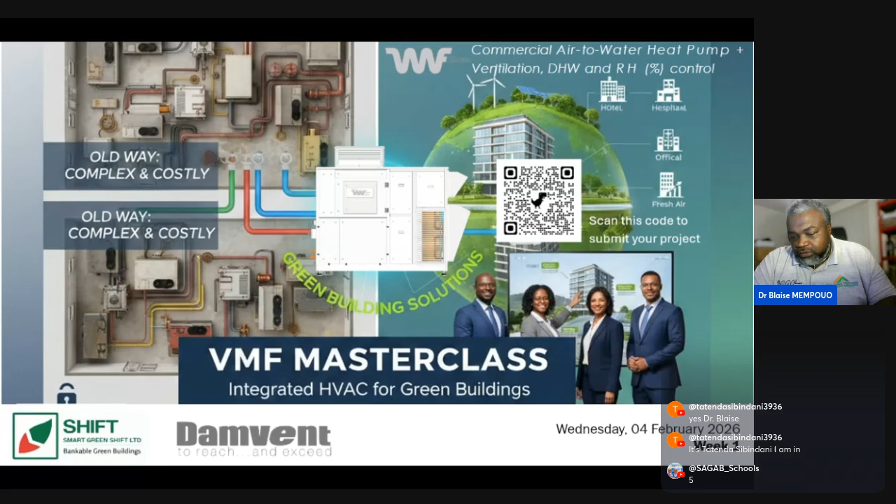So tonight I will try to cover a bit this first session. As you can see here, this is a masterclass about integrating HVAC for green building, from Damvent in Bulgaria. My name is Dr. Blaise Mempouo, I'm Damvent's Africa Market Development Lead. We are trying to work in partnership with Smart Green Shift Limited, based in the UK. Today I'm trying to introduce our ultimate energy saving total HVAC concept with a VMF. So the masterclass is all about that.

Before I move forward, what are you going to learn today? People attending the webinar today, this masterclass is mostly, it's not your usual webinar, but here it's about action. So our first idea is why this masterclass has been set up. I'm trying to discuss a bit about that, and then I will follow up with what is the VMF and the project and the application.

And how the VMF is linked with the EDGE certification. I'll try to discuss that and then do a bit of the base case study, and then move on to discuss the masterclass journey, how you can go through the masterclass. Because the masterclass is not about any current regular webinar, it's about a kind of journey. We are here to support your project to go from the idea to something real in the real application.

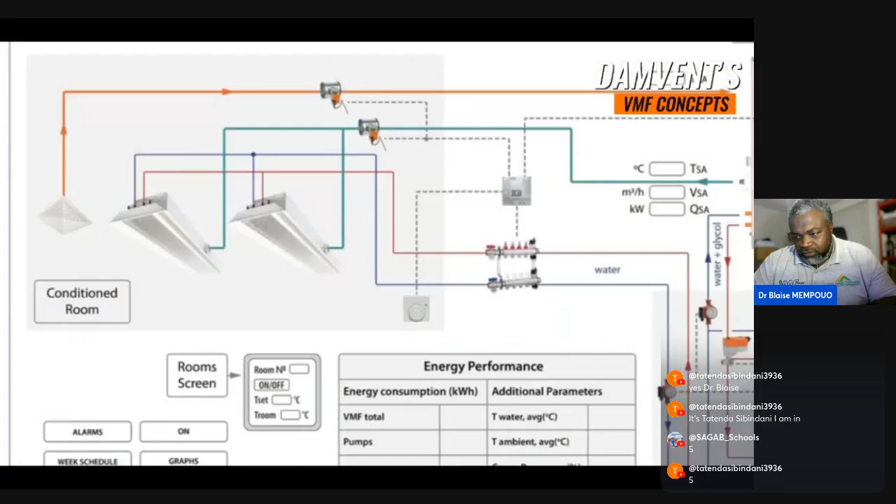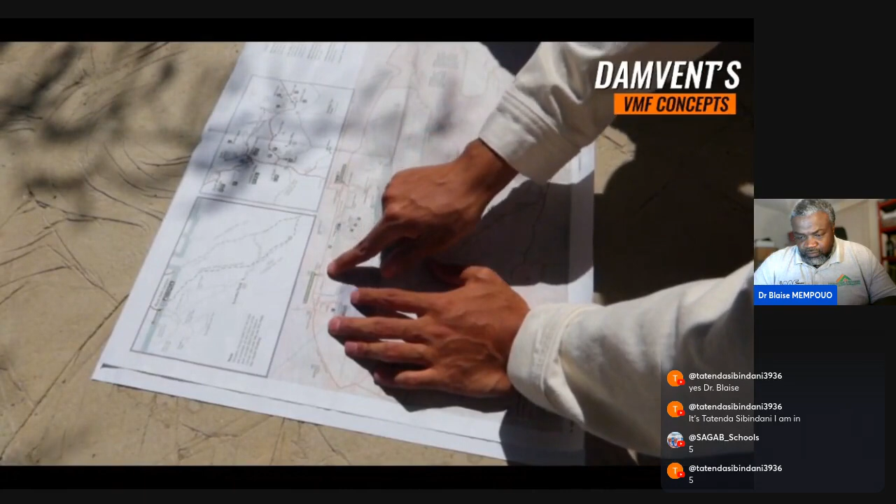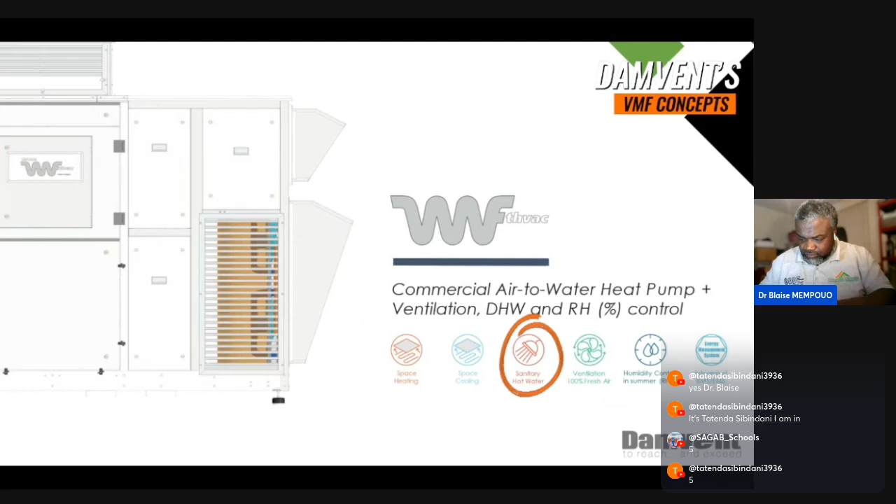Welcome to Damvent's accredited professional program, where we aim to lead the green building industry through innovative HVAC solutions. This program is designed for sustainability professionals looking to gain a competitive edge in the field of green building certification. Our key focus is Damvent's VMF technology, a complete HVAC concept integrated with building management systems. It covers heating, cooling, ventilation, domestic hot water, and humidity control in cooling mode, all while ensuring high energy efficiency. Through this program, participants will deepen their expertise in using VMF concept to meet green standards like EDGE, LEED, and more. With VMF technology, professionals learn how to optimize building performance, reduce energy consumption, and enhance indoor air quality, all crucial elements in achieving sustainability certifications.

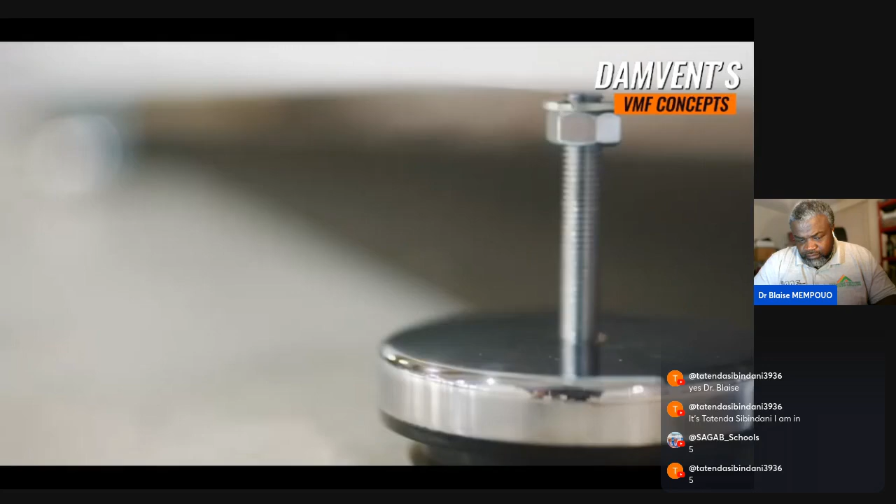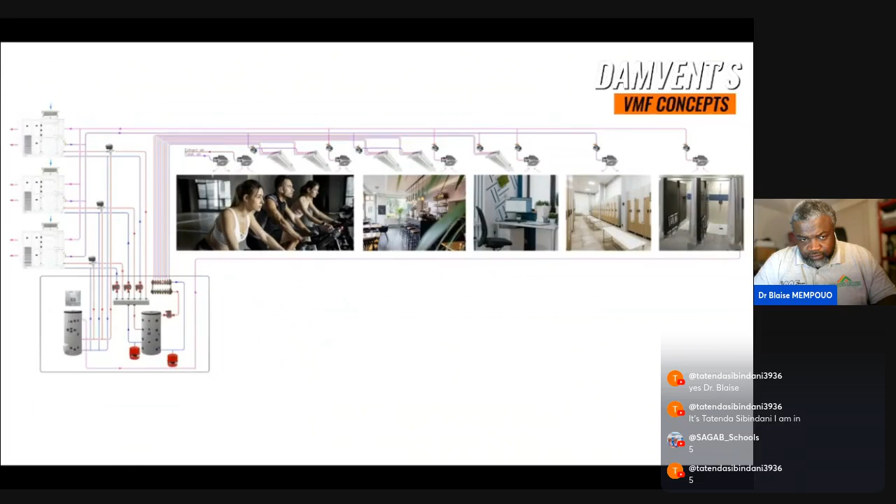The program not only offers technical training, but also provides marketing insights to effectively communicate the benefits of our systems to clients and stakeholders. Damvent's VMF concepts are versatile and designed to serve multiple sectors, including healthcare buildings like nursing homes, hospitals, and clinics. They are also ideal for retail spaces such as leisure centers, shopping malls, and supermarkets. Furthermore, our technology is a perfect fit for educational facilities, including schools, universities, and sports centers, as well as for office buildings or mixed-use developments combining office and retail spaces.

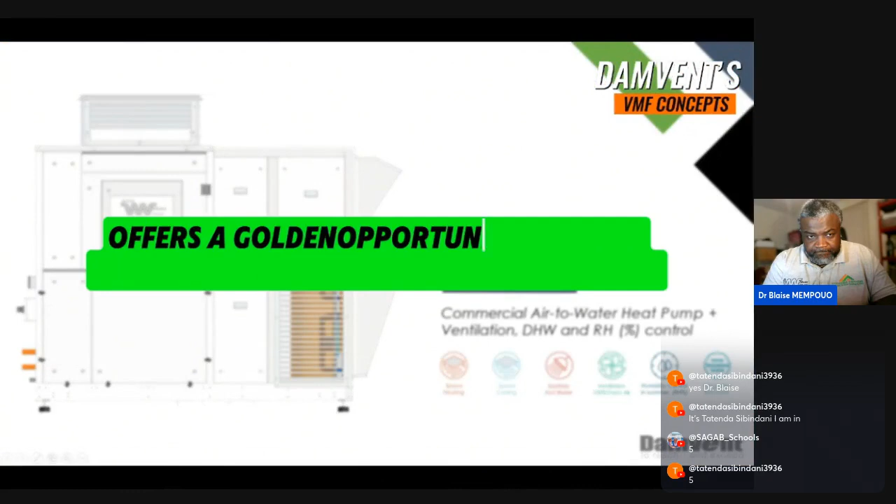After completing the structured training and certification exam, you'll receive an official accreditation, joining a network of certified professionals promoting VMF technology worldwide. This isn't just a technical journey, but a strategic one, empowering you to lead green building projects with confidence. If you're an architect, engineer, or sustainability consultant, this program offers a golden opportunity to stay ahead in the green building industry. With our global support and training resources, we are committed to making your journey towards sustainability impactful and rewarding. Ready to join?

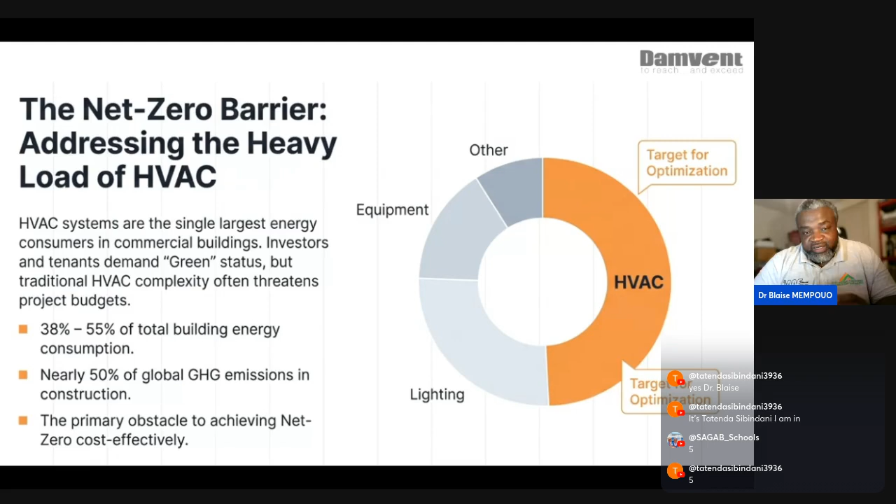At Damvent we can clarify that we're not just improving the VMF, the HVAC system. We're going to help support project owners or developers achieve net zero or zero carbon for buildings, mostly through very low energy consumption for HVAC applications in commercial buildings.

So we say that we're creating a complete new HVAC universe - a paradigm shift from legacy climate control, moving from the traditional way to a new hybrid VMF solution. That's exactly what the masterclass is about: to discuss and help you understand the new universe we're bringing to HVAC systems, and take you through that complete journey. This is the awareness class we are running.

So what is actually the struggle? If you're in the field, you know there's complexity out there. The problem is always juggling a complete system together. In a commercial building connected with an office, if you want to provide cooling, heating, and ventilation, most of the time there are challenges because you have multiple separate HVAC systems where a separate company may handle the cooling, the HVAC system.

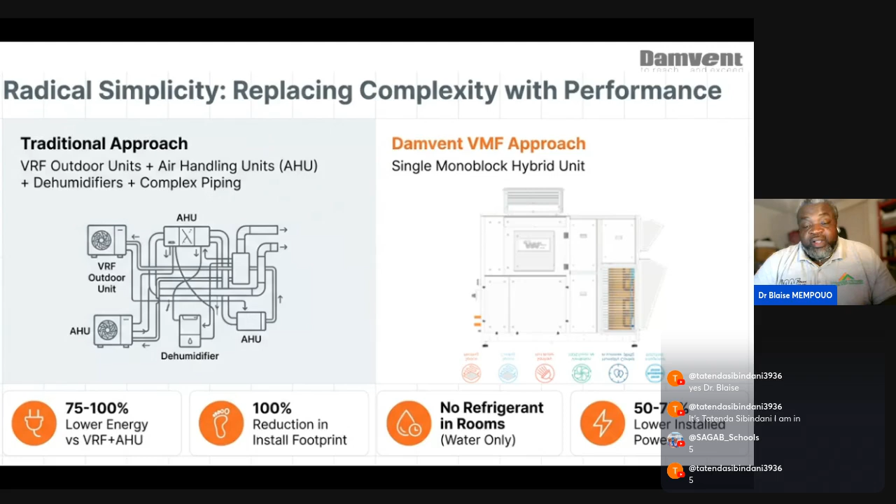Here we come with low energy compared to the conventional system, and also reduced footprint - I'll explain that later - in terms of installation footprint on the roof, and refrigeration too. We require no refrigerant in the building, which I'll explain in detail later. We also have low installation power. That's just to set the scene.

Another angle is the tropicalized technology, because HVAC in tropical climate countries, like most African areas, deals with high humidity levels. As you can see on the screen, the green areas are normally comfortable in this climate - we need dehumidification, close to 80%. In those climates, most of the time we don't just dehumidify, we also need to cool down, so we control temperature instead of just looking at humidity.

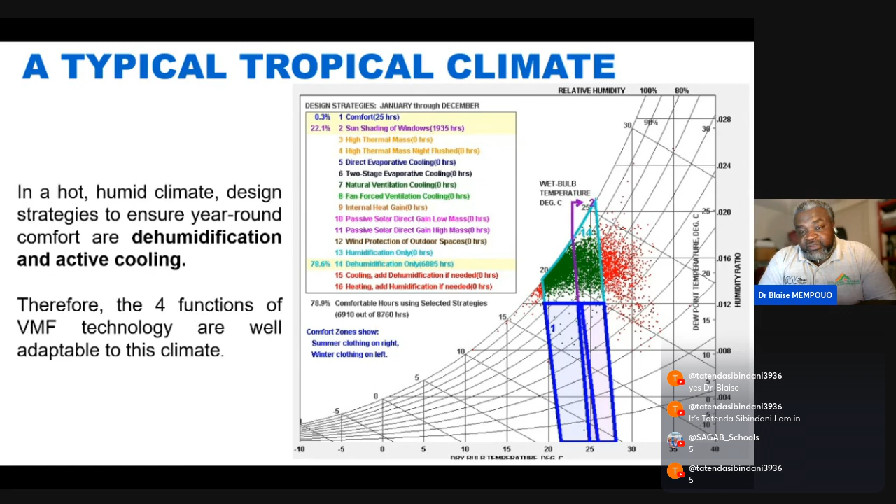If you look at it now, the remaining area in red has to be cooled down before dehumidifying. That's exactly where the high energy consumption in most conventional systems lies. That's exactly what we're trying to solve as an issue.

Okay, so now what's the VMF? I'll show a pre-recorded video from my colleague, Dryan, presenting what VMF is to you, starting with a short description of what VMF is.

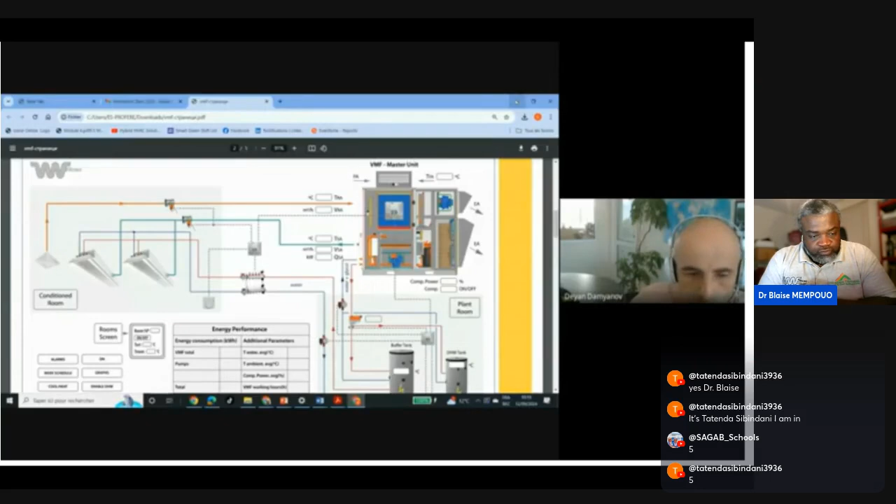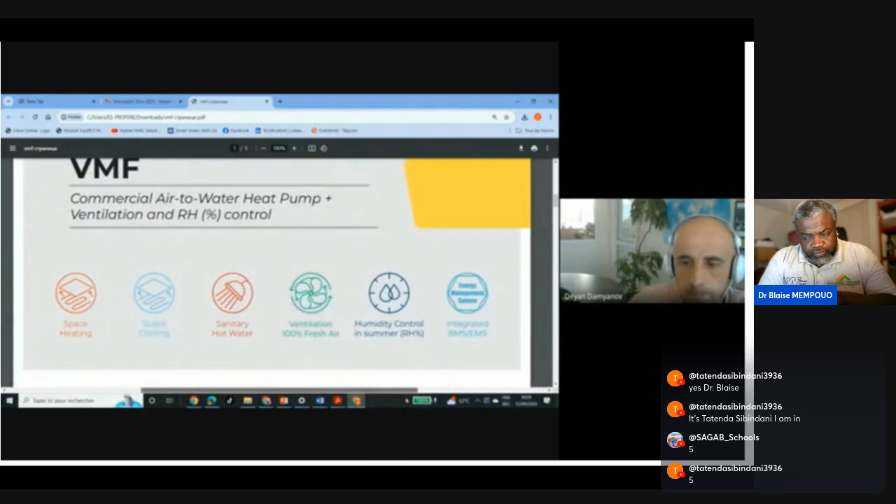VMF meaning is variable multi-fluid concept - not multi, but variable fresh air, variable refrigerant, and variable water all at the same time in one unit. As a description, VMF, and categorization, VMF is a hybrid.

Very often you will be asked, what is VMF? Is it a VRF? No, it's not a VRF. Is it a chiller or heat pump? Yes and no, it's not. Is it an air handling unit? Yes and no. So VMF is a hybrid.

We have categorized it as a commercial air to water heat pump plus ventilation and relative humidity control. Our goal was with just one unit to cover all 5 main functionalities required for every project worldwide: space heating, space cooling, sanitary hot water, 100% fresh air or ventilation, and humidity control in summer, in cooling. Together with those 5 functionalities, we add another one, very important, which is the integrated building management system, or in our case called energy management system, because it's a higher level system that controls the whole concept.

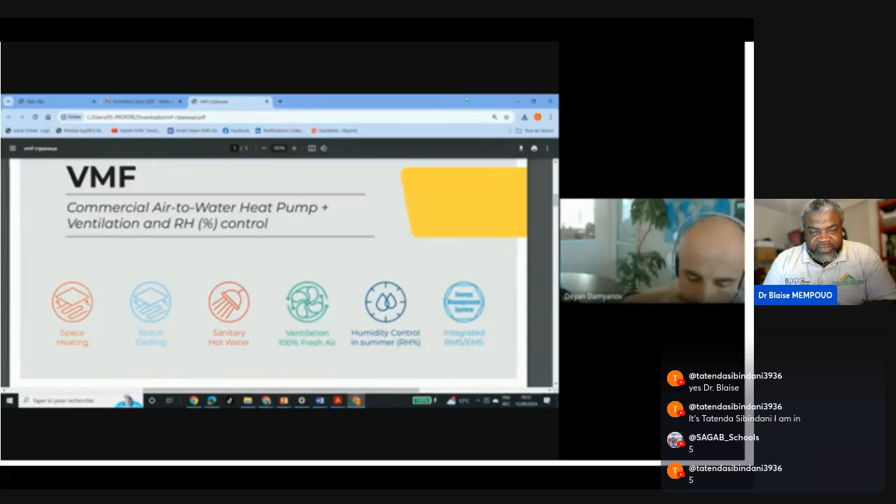I hope you clearly hear from Dyan, my colleague, because he's a bit late in his country, he cannot participate directly. He cannot give us a summary of the VMF.

So that was a kind of general definition of VMF. But when you look at it, we also have an internal unit. We don't use the chill beam, we don't use the cassette. Here in the VMF, we try to combine our external unit with the internal unit. Here is active chilled beam technology, which can be active chill for cooling or heating, both.

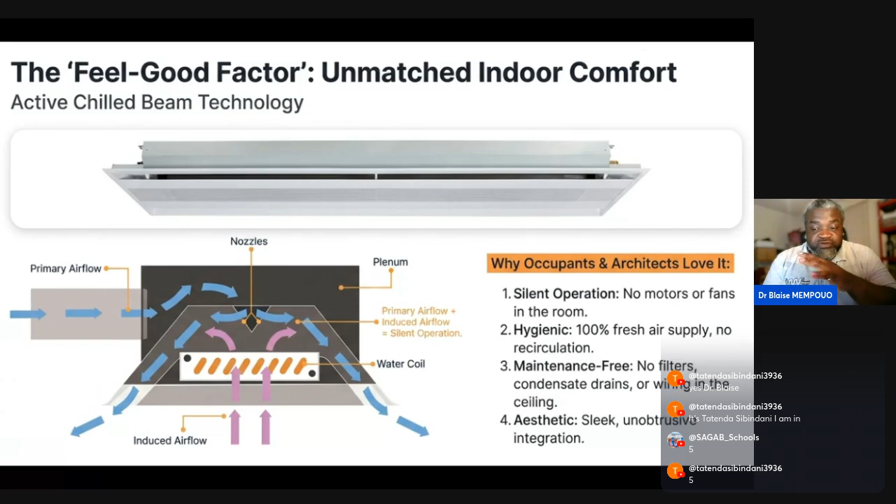As you can see, it's silent because you rely on water instead of refrigerant inside the building. So we have no motor, no fan indoor. It's always hygienic, 100% fresh air supply, no recirculation, because most cassettes use recirculation, meaning they use the same air in the room to provide you comfort, which normally doesn't work. Here, every time we have 100% external fresh air from outside. Maintenance free, and also aesthetically very integrating to any type of project.

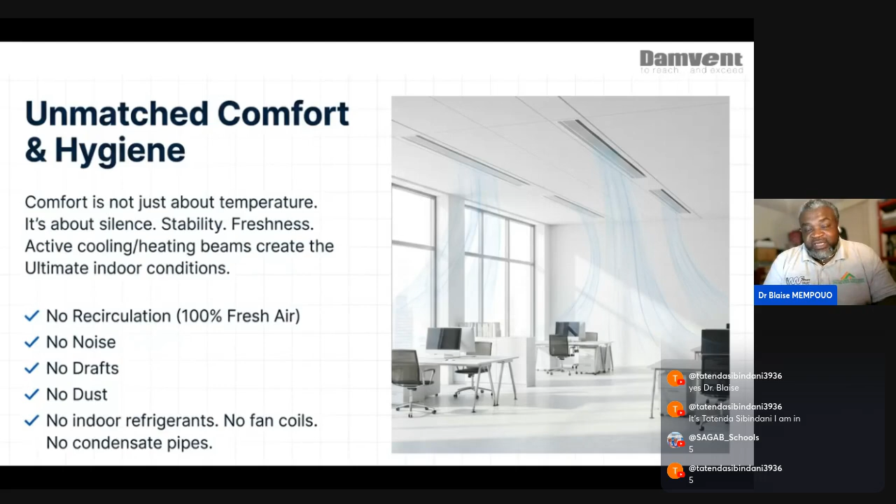In terms of comfort, the advantage of using the VMF, or mostly the chilled beam one, the active cooling or heating beam, creates the ultimate indoor condition. As I mentioned, no refrigerant inside, no noise, no drafts, no large dust, no small dust. There's no refrigerant, no fan coil, so no condensate pipe. All of this saves us some cost and some installation challenges, which is very important.

So in general, we are kind of zero indoor maintenance. No indoor electronics, no filter changes, no refrigerant to check or leak, no leakage to worry about inside. It's an independent remote system. You can easily get access to your system all over the world to assist you just in case you have any issues. So remote monitoring is possible also through Damvent.

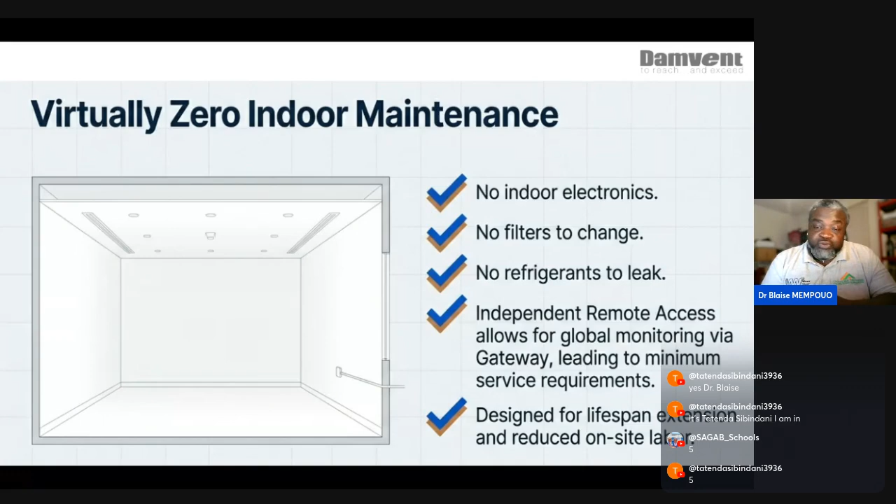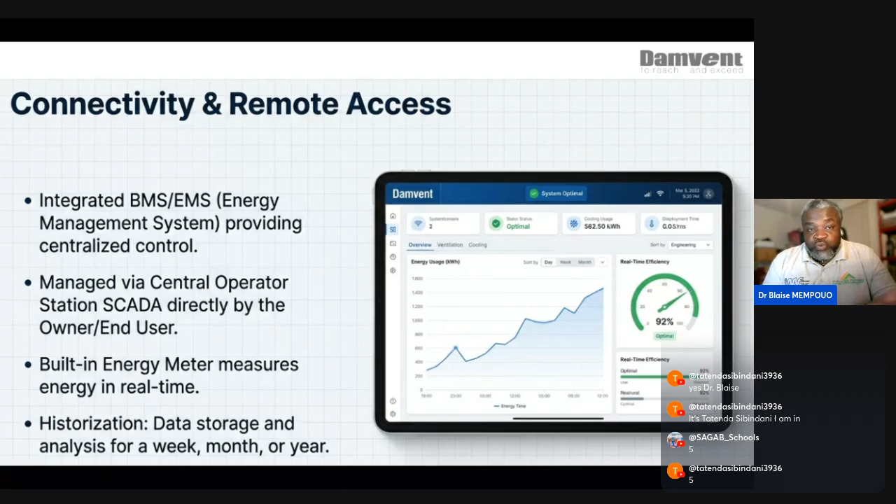It's also designed for lifespan extension. You can extend and integrate with other connectivity in terms of BMS system, Modbus, or data monitoring system, so it can easily be managed. The advantage here is that you don't need a separate BMS system, it's already an integrated energy management system, as he also clearly said during his presentation. The historical data can be stored in the Damvent storage system, weekly, monthly, or yearly, making it a very smart system which you don't need to look at another alternative system for.

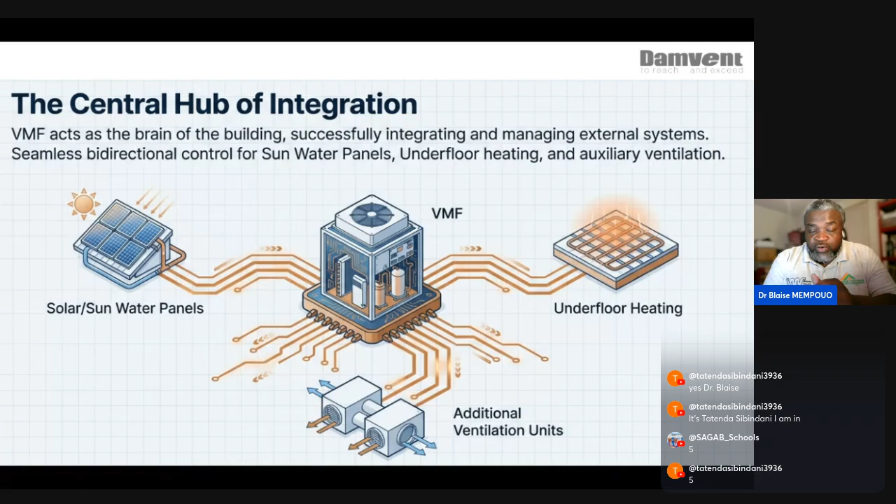When you look at the advantage of VMF, we built that for the future. It can be integrated with a solar system, which makes it more efficient. You can even add additional ventilation to it. That also makes it very efficient and provides stability for underfloor heating, because the heat it provides is very stable. It's a plug and play unit that stands completely outside, and it can be combined with other alternative systems.

When you look at the cost comparison between the system, the VMF and the conventional system, like I already mentioned, it saves us a lot of power. Power is really reduced. Installation power is reduced 50 to 75% in terms of peak demand, and it's also integrated domestic hot water.

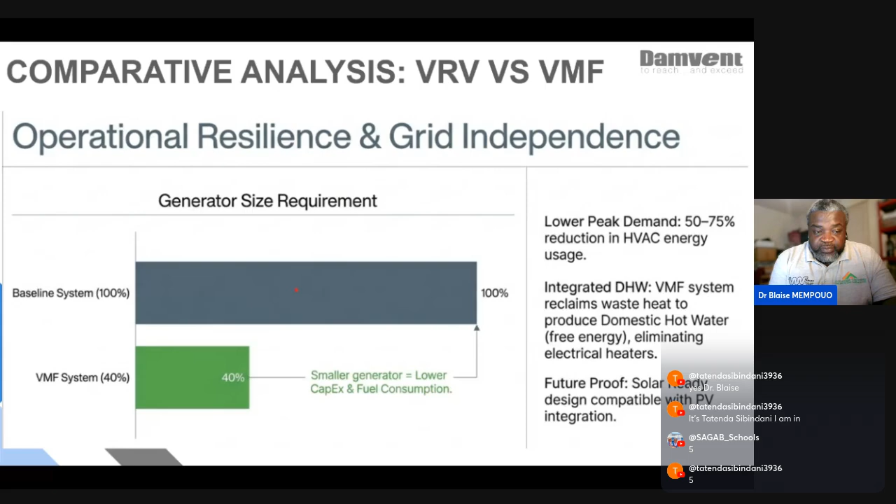I already mentioned that earlier, and free cooling that I'm going to explain later. And the solar-ready design compatible with PV can easily be integrated, so it's easy to apply in countries where we have problems with power shortage.

Yeah, it's true, because we offer so many benefits from the beginning. Maybe the capex might be a bit higher, which makes sense because we provide more functionality compared to the conventional system.

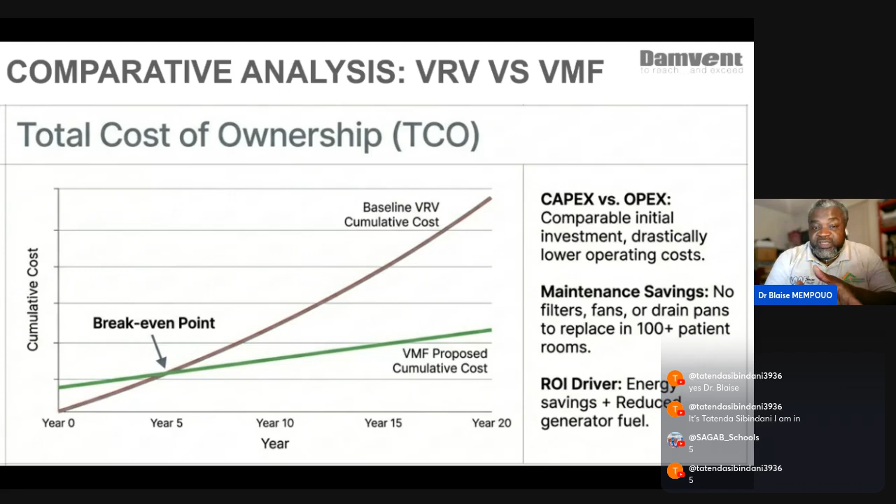Whereas with the VMF, you're going down, because all the benefits, as he mentioned during his presentation, are variable water, variable refrigerant, and air, which create a great advantage in terms of energy consumption. We also integrate the energy management system that makes it easy for you to monitor, because we have the economizer, the free cooling or free heating, that makes for very high energy savings also.

So here, what exactly, if I want to summarize this masterclass, this is a kind of summary of what I just mentioned. I'm going to play a little video again that summarizes everything I already discussed. I'll go a bit further and explain a bit more.

Today, we're going to talk about a piece of tech that is completely changing the game for how our biggest buildings breathe, stay warm, and keep cool. It's called a VMF system, and honestly, it's a huge leap forward.

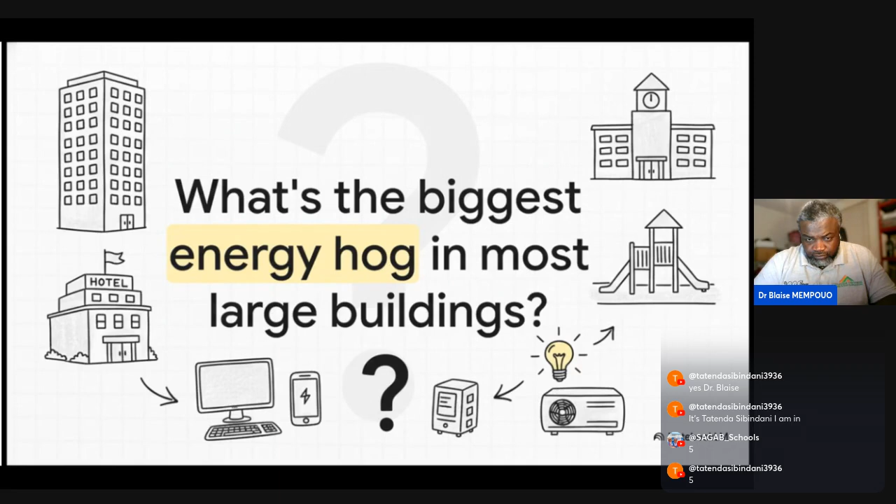But to really get why it's such a big deal, we first have to look at the problem it's built to solve. So let me ask you something: when you picture a big office building or a hotel, what do you think is using up the most energy? Is it the lights, the thousands of computers, or maybe something else entirely? Yep, if you're thinking it's the climate control, you're absolutely right.

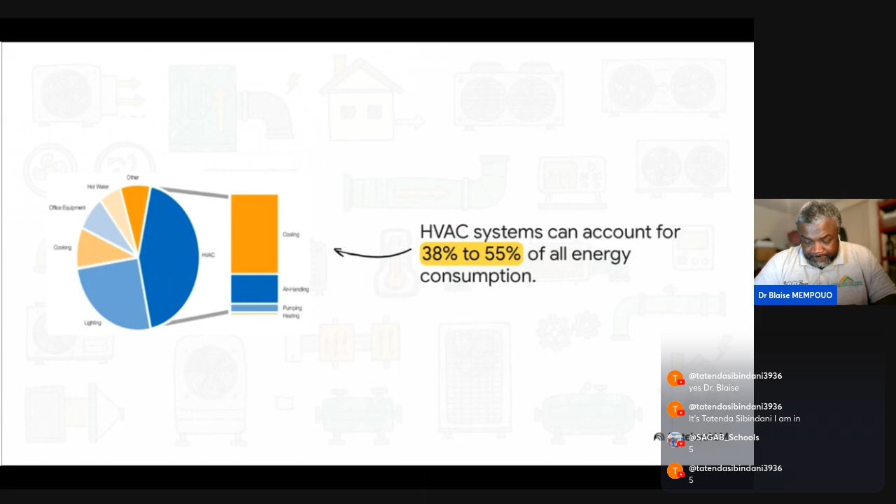The amount of energy is just staggering. In a normal commercial building, the HVAC system, that's all your heating, ventilation, and air conditioning, can guzzle down anywhere from 38 to 55% of all the energy used. That is a massive slice of the energy pot.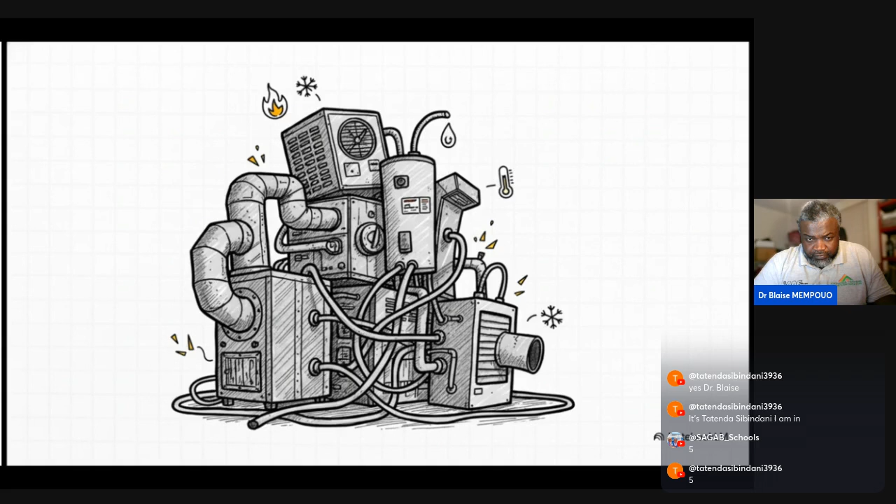For decades, the climate system in a big building has been like one of those old component stereo systems from the 80s. You've got a separate box for the heater, another one for the AC, one for ventilation, maybe another for hot water. They're all kind of Frankensteined together with a mess of wires and pipes, and they don't really talk to each other. It's complicated, it takes up a ton of space, and it's just not very efficient.

So if the old way is that clunky stereo system, the solution is much more like a sleek, modern smart speaker that does everything in one. And that, right there, is where VMF technology comes into the picture.

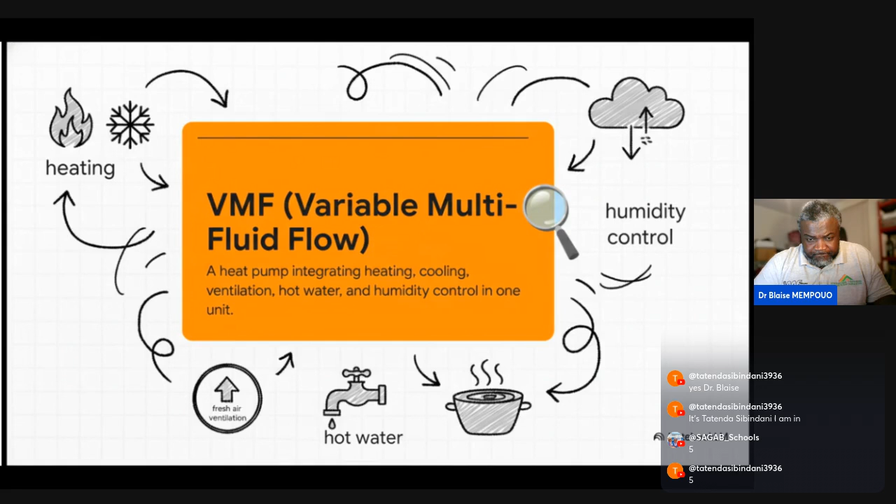Okay, so what is VMF? It stands for Variable Multi-Fluid Flow. Yeah, it's a commercial air-to-water heat pump, but the real magic is how it puts everything together. It takes all those separate jobs, heating, cooling, fresh air, hot water, even managing humidity, and packs them all into one single super smart unit, the whole shebang.

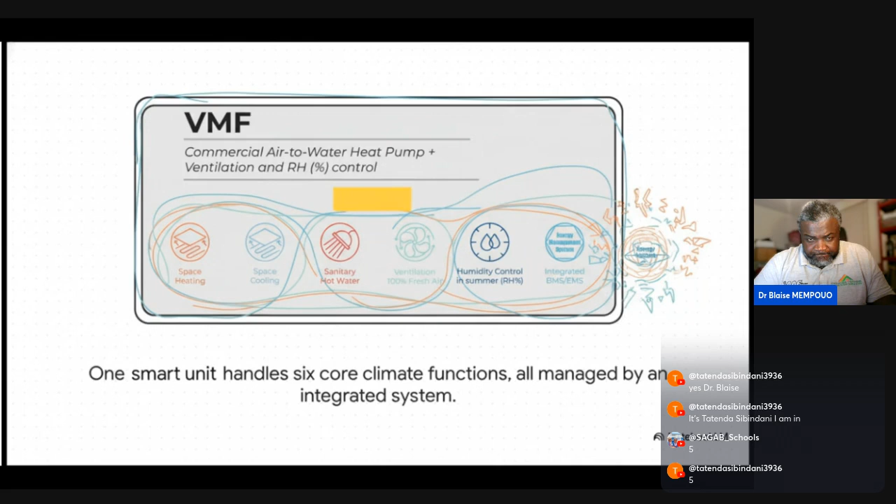So instead of a whole room full of different machines, you just have one smart unit doing 6 different jobs. And it's not just about putting them in the same box, it's about making them work together perfectly under one brain. Let's just follow the flow for a second.

There's a single master unit, usually up on the roof, that does all the hard work. It treats the air and water, and then, this is a key part, it sends treated water, not refrigerant gas, down into the building. That water flows through special units in each room that quietly use its temperature to either heat or cool the space. It's elegant and simple.

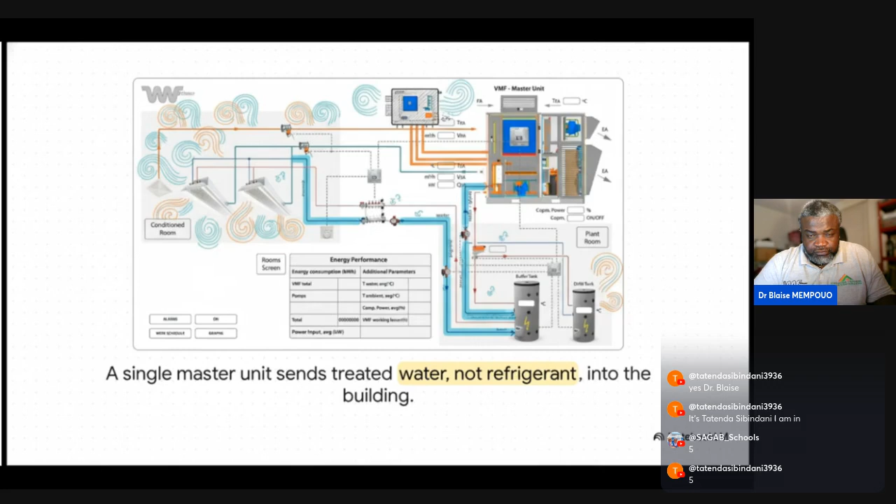Now, this all-in-one approach isn't just a neat trick. It has some incredible real-world benefits. The whole system ends up being smarter, way simpler, and a lot healthier. So let's break that down. Okay, let's get into the numbers because they are pretty dramatic.

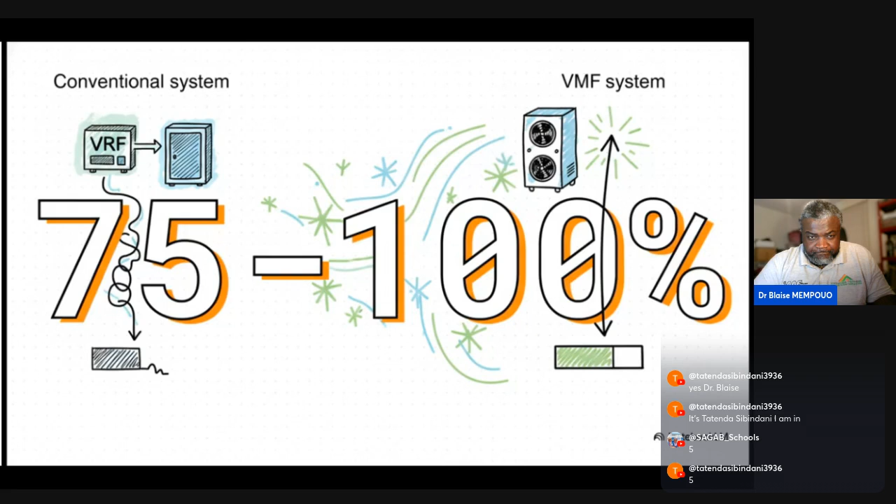Compared to a standard conventional system, the kind with separate refrigerant units and big air handlers, a VMF system can use 75 to 100% less energy. No, that is not a typo. We're talking about, in some cases, doubling the efficiency. It's wild. And because it's so much more efficient, it just needs way less power to run in the first place. The total power you need to install can be 50 to 75% lower, and that means less stress on the power grid and way smaller requirements for those expensive backup power systems.

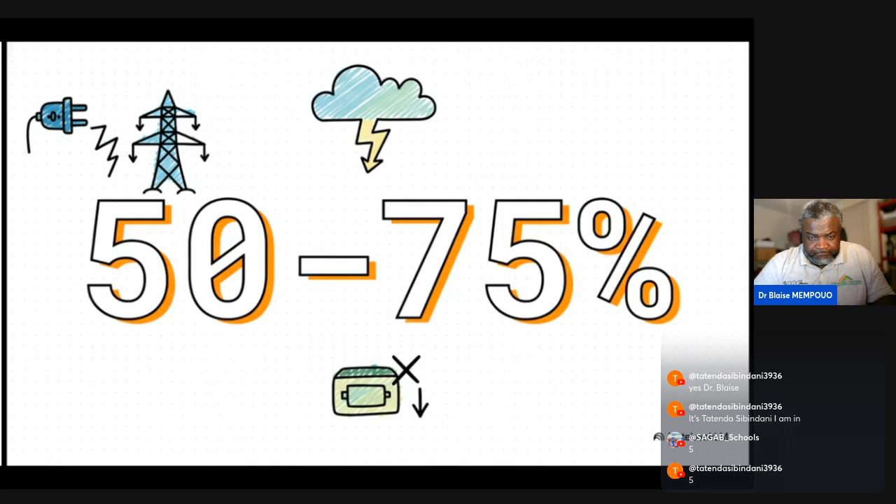This one is all about your health. VMF systems are designed from the ground up to use 100% fresh outside air, so there's no recirculating stale, old indoor air, which is something older systems do all the time to try and save a little energy.

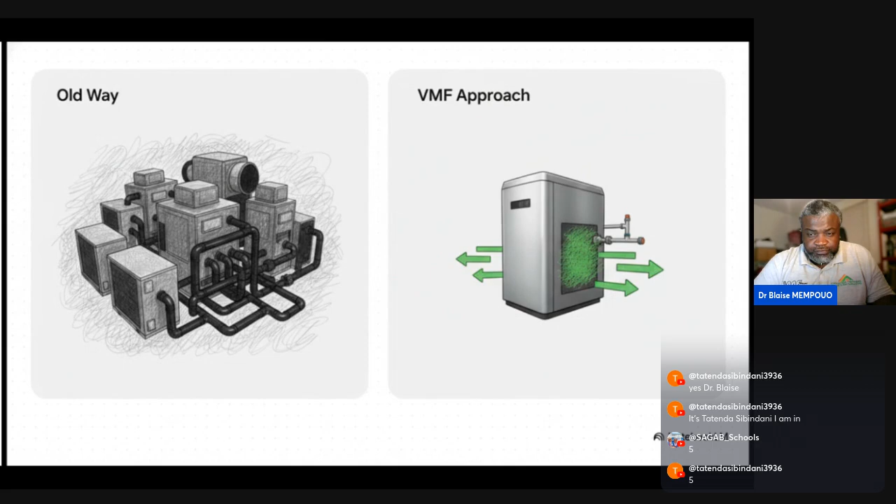Here, the focus is just on giving you the cleanest, freshest air possible. When you put them side by side, the difference is just night and day. On one side, you've got the old way: a bunch of separate units, a massive footprint, super complex installation, and you're often breathing recycled air. On the other side, you've got VMF, a single compact unit that's basically plug and play and guarantees you're getting fresh air. It's a completely different philosophy.

So how does it pull this off? Well, if you look under the hood, it's packed with smart tech. A huge piece of the puzzle is something called heat recovery. The system literally captures the heat from the air that's leaving the building and uses it to warm up the fresh air that's coming in. It's basically recycling energy that would otherwise just be thrown away.

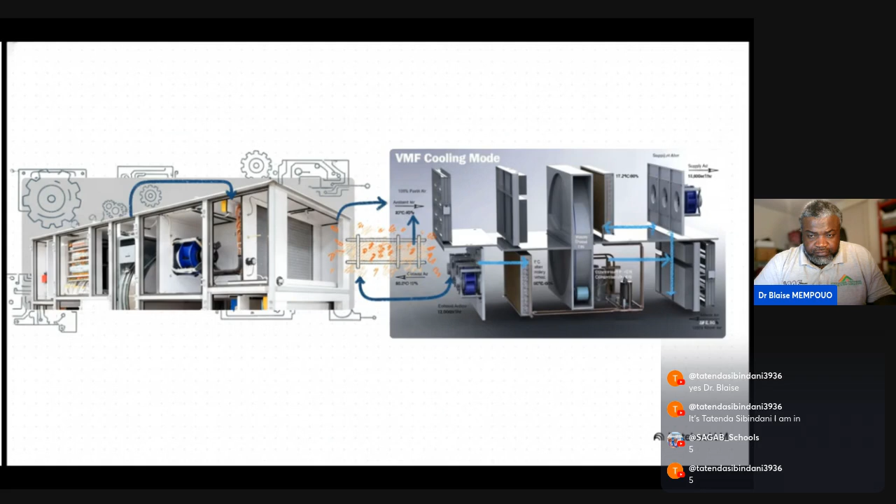But beyond all the energy savings, think about what it feels like for the people actually in the building. It's a huge upgrade. Since only water is flowing through the pipes indoors, there's no refrigerant in the rooms with you. And those in-room units have no fans, so it's totally silent. You just get this gentle, consistent temperature without any of those annoying drafts. And it even controls the humidity. It just feels better.

Okay, so let's zoom out for a minute. This kind of technology doesn't just exist in a bubble. It plugs directly into a much bigger conversation we're all having about sustainability and what the future of our buildings should look like. And this quote just nails it: right now, being able to prove that a building is green is more critical than ever. Everybody, from investors to tenants to city regulators, is demanding higher and higher standards for efficiency and sustainability. And that is where a system like VMF becomes a developer's best friend.

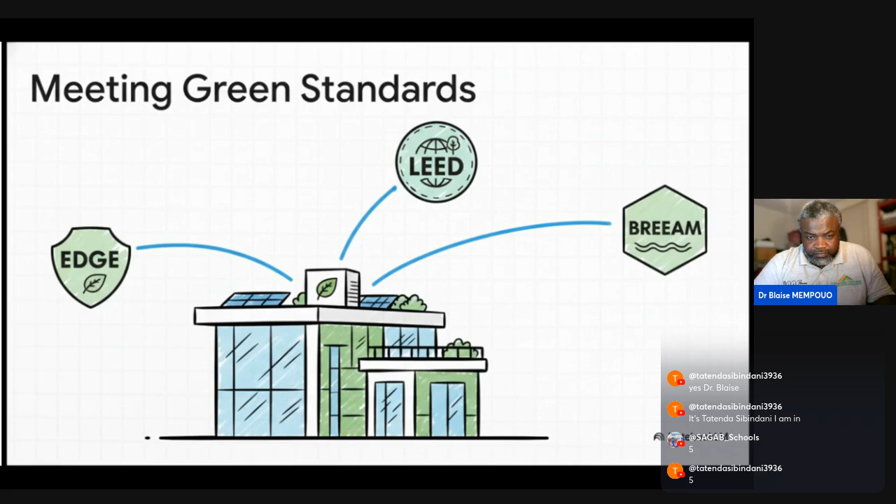It's specifically designed to crush it on those tough green building standards like LEED, BREEAM, and EDGE. A single VMF unit can help you check off a whole list of requirements all at once, which makes getting those really valuable certifications a whole lot easier and cheaper. So what it all comes down to is this: the tech we use to build our world has to evolve. Systems like VMF are showing us a path to buildings that are not only lighter on the planet, but are also just plain healthier and more comfortable to live and work in.

Which really just leaves us with one big question to think about: as our world keeps changing, how are our buildings going to change with it?

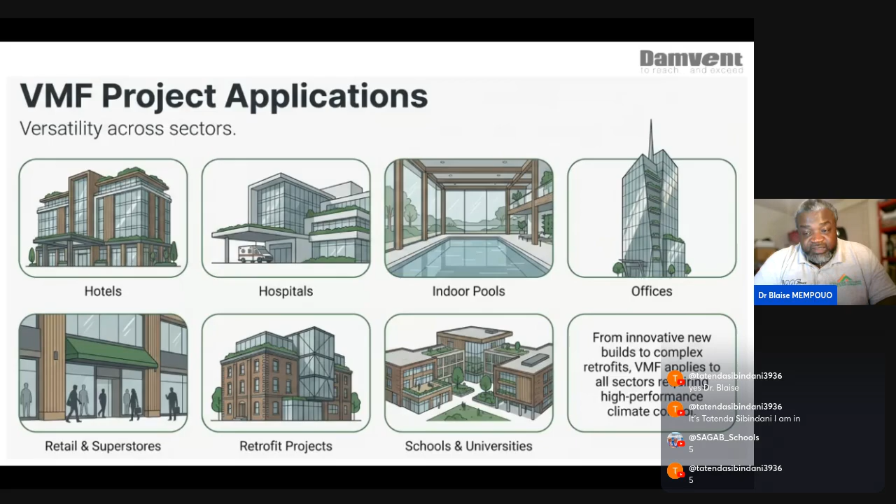Today, we're going to look at the applications. If you look at the different applications, we have several. This VMF can be applied to hotels, hospitality, or hospitals, for indoor air quality with additional air management systems, like our Maxi Pool system, which can be combined with VMF to create a very high efficiency system. Office buildings can also be applied, retail and superstore retrofit projects can also be considered, as well as schools and universities. So whether you have an innovative new build project or a complex retrofit project, we can also assist. This VMF can really be applied to any sector.

As I already mentioned, and as you saw during the video, the footprint is very reduced because we reduce the complex system to a simple and intelligent system. So we optimize not only the energy consumption, but also the installation strategy. That saves a lot of costs and reduces costs in terms of installation. So we replace separate units with elegance, and that creates an easy path for green building certification like EDGE.

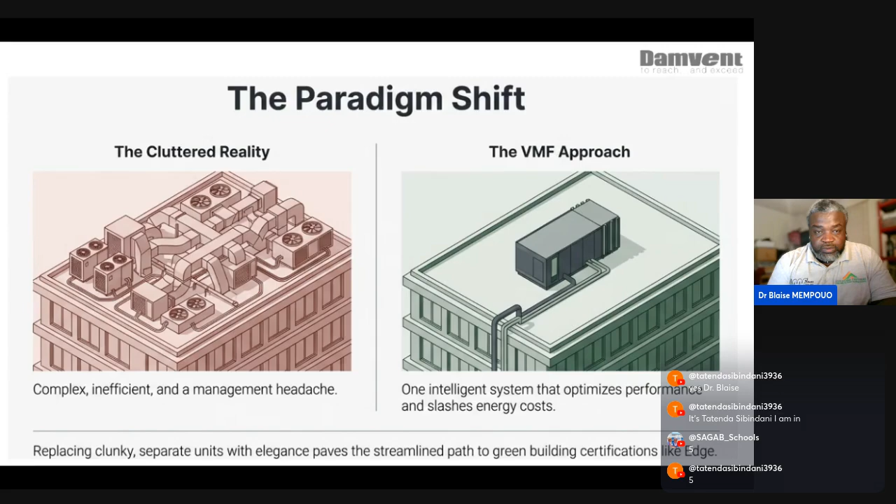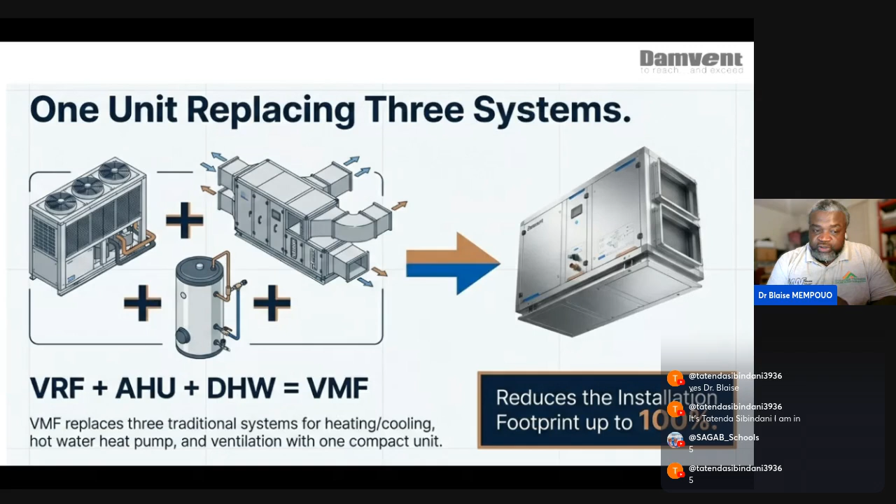Like I mentioned before, you can see here we kind of take down 3 systems - VRF, AHU and the water system - and make it one, reducing installation footprint by up to 100%. So in general, you substitute 3 traditional systems for one.

Another advantage is that, like I mentioned earlier, most of the time we have problems with different consultants coming into the same project, depending on the hardware, the software, and the performance. That means we take 100% responsibility. So we provide you a turnkey solution for your total HVAC system. We can control everything from a single unit, and every functionality can be provided from only one single unit.

Like I also mentioned, we eliminate the blame. There can sometimes be conflict between the equipment vendor and the controller integrator, so we take full responsibility.

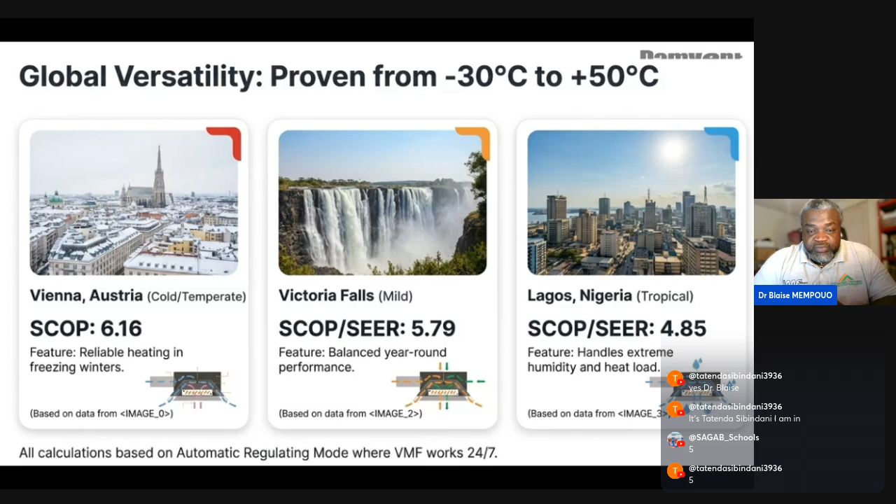This is the projected value we have, from the modeling and also from some practical testing. In terms of performance, this is what we have. We tested in cold and temperate climates and can reach close to 6 in terms of COP. In Victoria, with the mild climate, we can reach up to 5.79, and in the tropical region close to 5.

And the alignment with the edge now, with the edge application - only with one system, one edge, one VMF unit, you can reach up to 8 measures in edge. That has been validated because we just certified a project where we integrated VMF, and all have been accepted by the auditor and the certifier. So edge can easily help you achieve cooling, variable speed drives, fresh air preconditioning, space heating efficiency, domestic hot water, and economizer free cooling. And also smart meter, like I mentioned before, and low impact of refrigerant, because there's no refrigerant in the building - we eliminate a lot around the building.

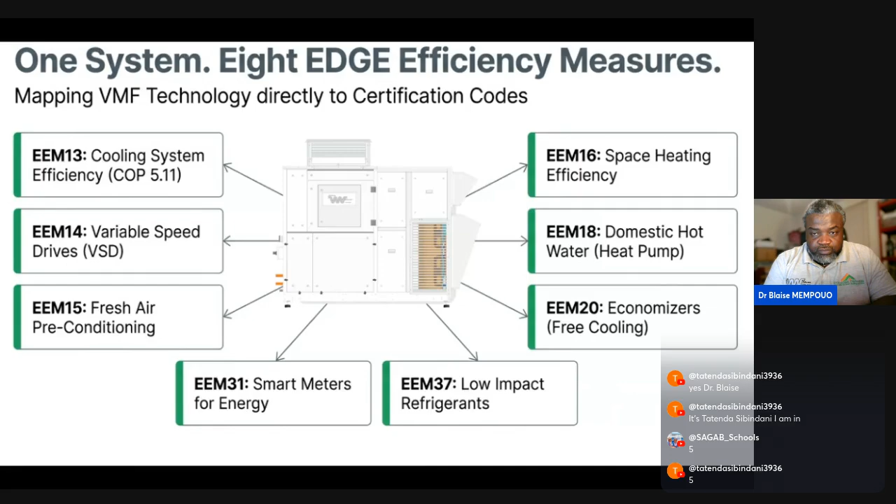For precision, just in case you want to model the edge, like I mentioned, here's how it's justified. I'm going to go through some of the measures here. You can see variable speed smart control has been well achieved through the pump, through the compressor, and also some integrated BMS system. Through the MOD bus it can easily be controlled, with external automation not needed for this project.

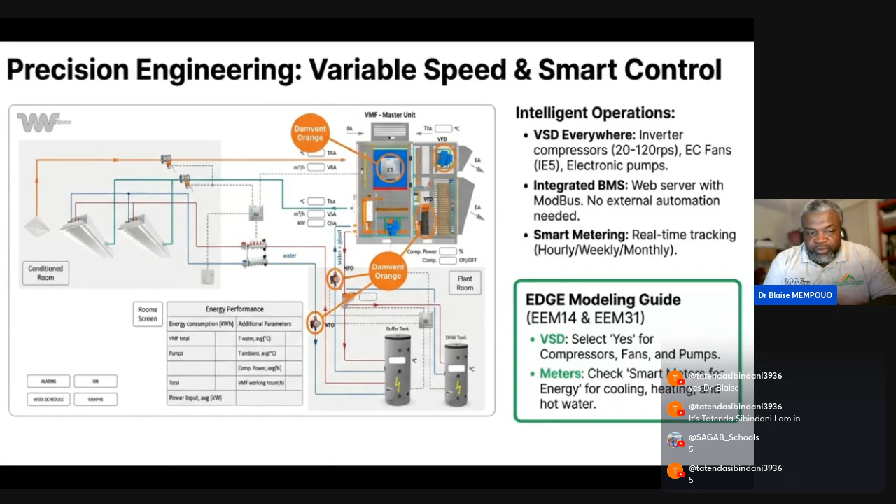And also, like I said, the smart meter has been integrated through MOD bus, but it can easily be traced. And for the free cooling, 100% fresh air, like I mentioned earlier, this is measure EEM15 and EEM20. If you want to model that through edge, you use the free air cooling, cross plate exchanger, and dew point control. That will easily be controlled in summer, mostly humidity, because remember humidity is only controlled in cooling mode.

Economizer is free cooling. So when the outside air is appropriate, the system stops cooling, stops using the compressor. The compressor doesn't cool anymore - it just provides free cooling in the building. That's the advantage. If I bypass the compressor, you can see it on the slash there.

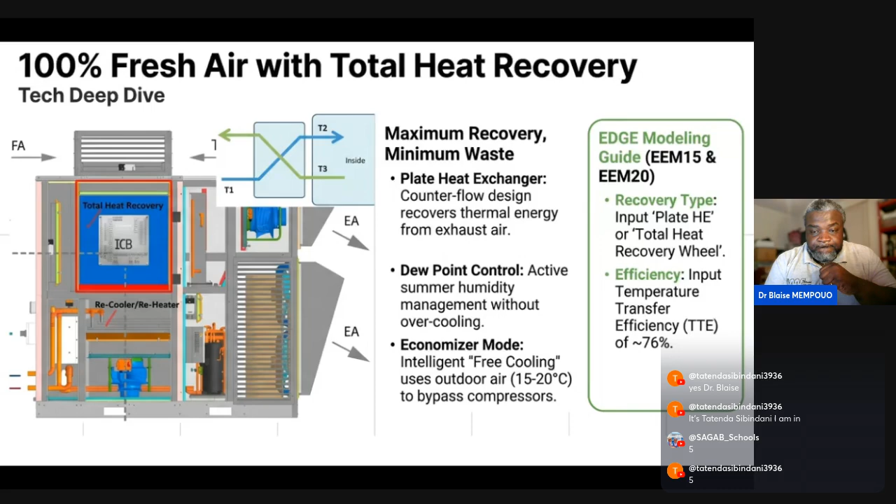You also see edge integrated with space heating where we can store some heat because there's a water storage. It's a great advantage, because in areas where electricity may be cheap or expensive during certain periods, we can store heat or cool and use it when electricity is more expensive. The BMS has been integrated to monitor the system, so we can easily spot when power is expensive or cheaper.

Let me finish explaining. I was saying that for space heating, we have a storage hot water system - a big storage system now. We can store hot or cool. So in countries where we know power is expensive during some periods, we can store the heat or the cold and use it later when power is more expensive. So when it's cheap, we store it, and when it's expensive, we use the stored one.

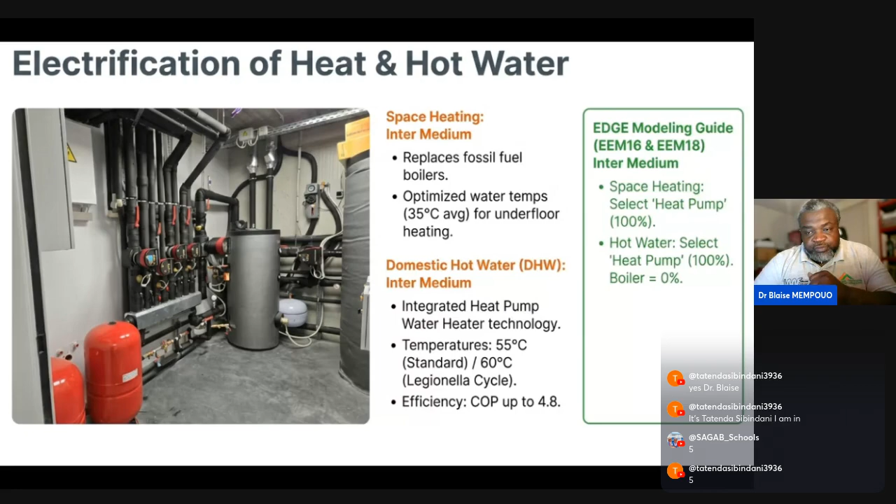What I want to say is this is not a prototype we're talking about here - it's not a new system we're testing. No, it's practical, and the system is already a proven system ready to scale up. I'm going to go through a short case study with you now, of a project already implemented in a real life project and monitored also.

There's a case study here, a summer project - that's one of the projects where VMFs have been implemented, but there are several. Like I said, in the coming week we're going to go through all of them, maybe together. The first one was a retail project based in Bulgaria. The internal floor area is about 1,000 square meters, and the need there was heating during winter, cooling during summer, ventilation, humidity control, and domestic hot water also.

We solved the problem there using only one VMF unit installed. As you can see, the VMF was installed on the roof - we have one system installed on the roof.

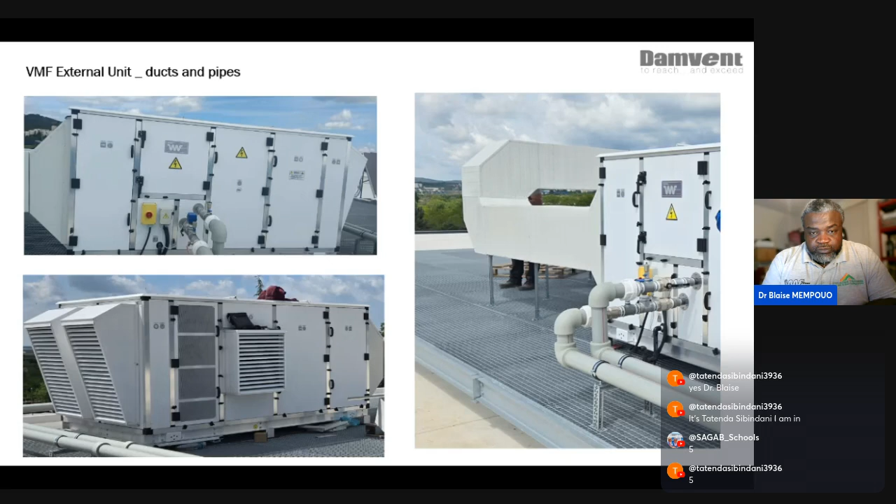And also we have our technical plant room with buffer down there and the pumps, with all the pumps in the real project. Like I said, it's not a prototype. This is really a real life project.

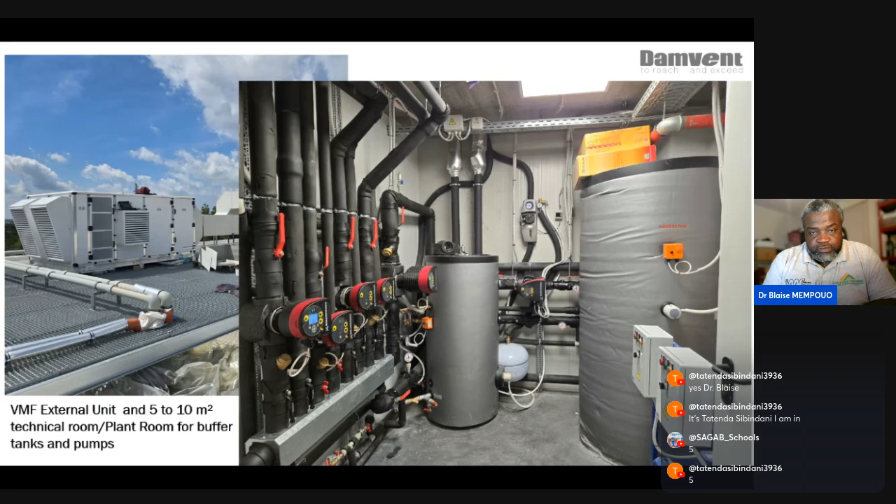And the internal unit was the chill beam, like I mentioned before. The chill beam, compared to cassette, is very thin, so it saves us space. You have two pipes going in with water, and the other pipe here you get the two pipe too. The big one, the gray one, is a duct going in. The chill beam works with water and also air, the fresh air coming from outside. Those two were the extractors.

You can see the thickness here. It's very thin compared to conventional cassette, and easy to install. Only pipe. You have manifold all over the building. We can go in different floors.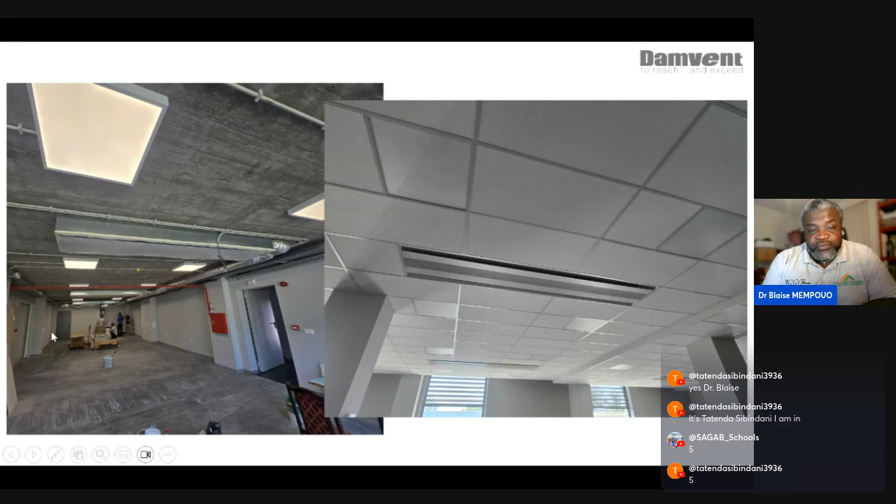This is the interface for the user, and this also for the energy management system. This instance will catch last year. We kind of stop it and then analyze it. You can see the air outside at that time was 31 degrees, and it was supplying a very comfortable temperature around 26 degrees.

Okay, let me summarize it quickly. The total energy usage they consumed was around 8. You can see here the installation power, the power input was 8, and the ambient temperature was, like I said, 28. The average temperature was 15. And the working hour we estimate at 17 working hours.

This is to create a set point to compare with the Daikin system working the same condition, assuming the indoor is 24 and the outdoor 28, to give us the same condition for comparison. The capacity index here was 70%, and the cooling capacity 48 for the one we are compared to, with ours close to 60.

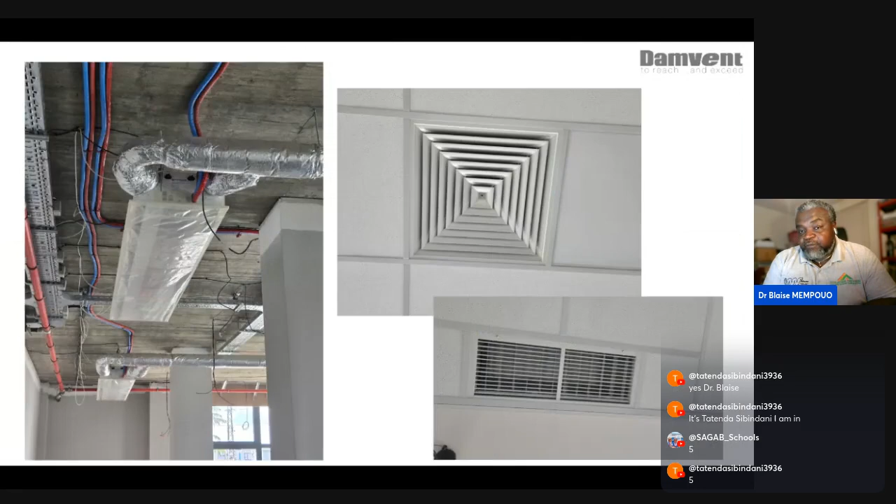If you want to achieve the same condition using the Daikin RYYQ18T, the same comfort, we will be consuming around 14.7 kilowatts, whereas we are talking about 8 kilowatts here for the VMF. This is real life. This project will be monitored through this project, and Daikin has some charts, some standards that you can easily compare and maybe simulate each working condition.

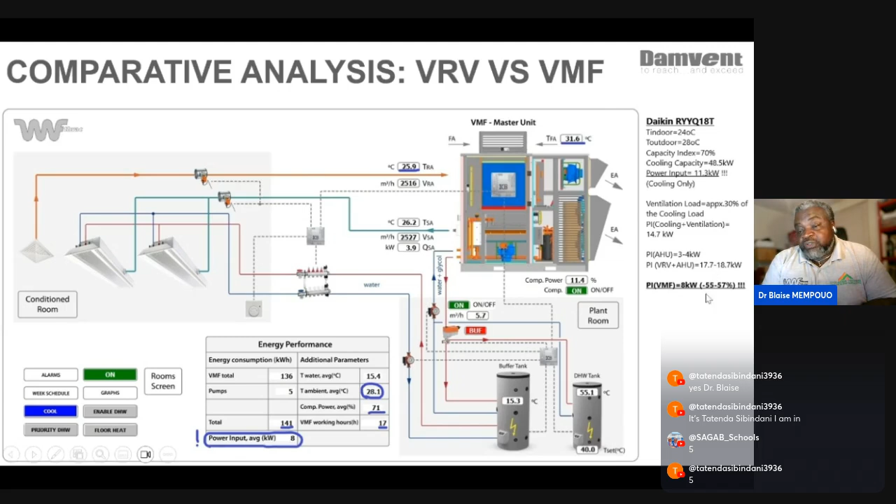So we can conclude that we achieved here about 55 to 57% energy saving, and then I'll move on to modeling, trying to model the same condition with Edge to see how we're achieving the same saving. Like I mentioned before, with VMF we can achieve at least 8 measures in Edge.

Okay, this is the modeling I did. If you look at the measures here, we have the first one which is cooling system efficiency, variable speed, fresh air preconditioning system, space heating system efficiency, domestic hot water, economizer, smart meter for energy, and low impact refrigerant.

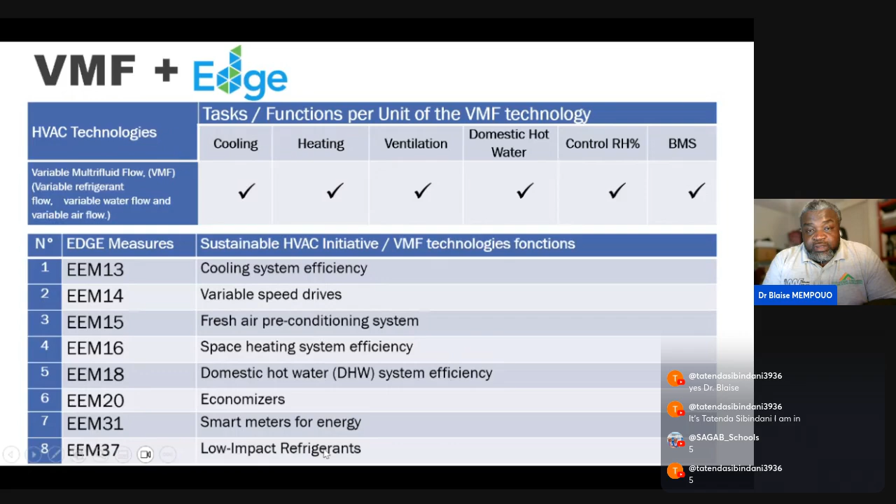You look here, the Stara Zagora project in Bulgaria, and also the measures I modeled, you can see ticked in green. The green tick means that's the measure that I will monitor. So I compare with the reference one, the conventional cooling system in Stara Zagora, or in Bulgaria. If you look at the first measure, it was cooling with the EEM13 cooling system, cooling efficiency.

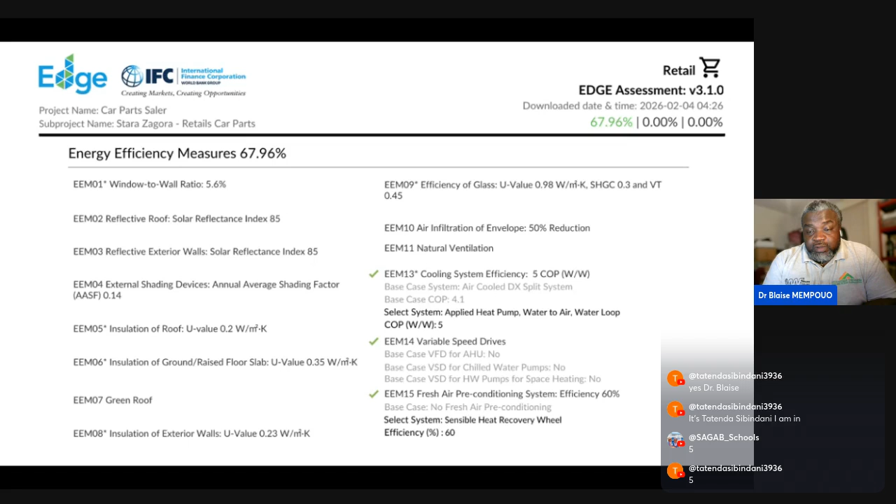And additional measure, because in Bulgaria we need heating and cooling, so it's not only about heating or cooling, we need both. During summer period we need cooling, and during winter we need space heating. So space heating was selected, and then I also select the domestic hot water.

That's obvious, but in this case we have a 65% solar system, because on this project there's an integrated solar thermal system. The system is set so that when solar energy is available, we go for the solar system. But when the sun is off, the heat pump will kick in and provide the hot water in the building. So in this case, around 65% of hot water needs were met using the solar system, and the remaining 35% with the heat pump.

And the economizer was also selected, along with the smart meter. So if you look at it, the last one is a low impact refrigerant. That is exactly what I see here, and it's clearly giving us the saving.

67.96% projected for this building, using only, if you look at it, what I modeled here is only VMF measures 1, 2, 3, 4, 5, 6, 7, 8. And you can clearly see the result here. We are projecting 67.96%.

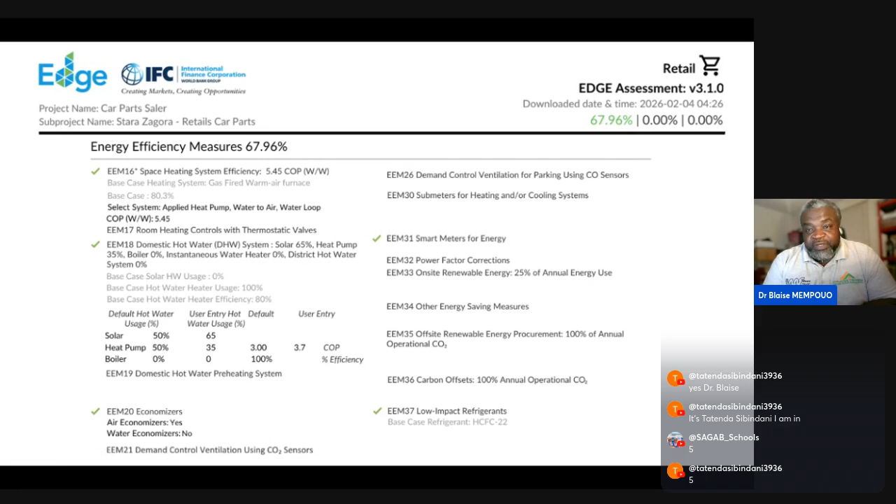I will appreciate if you have a project, you can also submit your project so we can go through it together, and then we can do the same modeling and show you that the VMF is really working. Yeah, it really can save you a lot of energy and a lot of installation power.

I mean, this is the result from VMF from the EDGE. You can see the result here. The improved case is here. We reduce around 67% of energy, and also the power. The carbon emission is also drastically reduced. We went from 125 to 42.

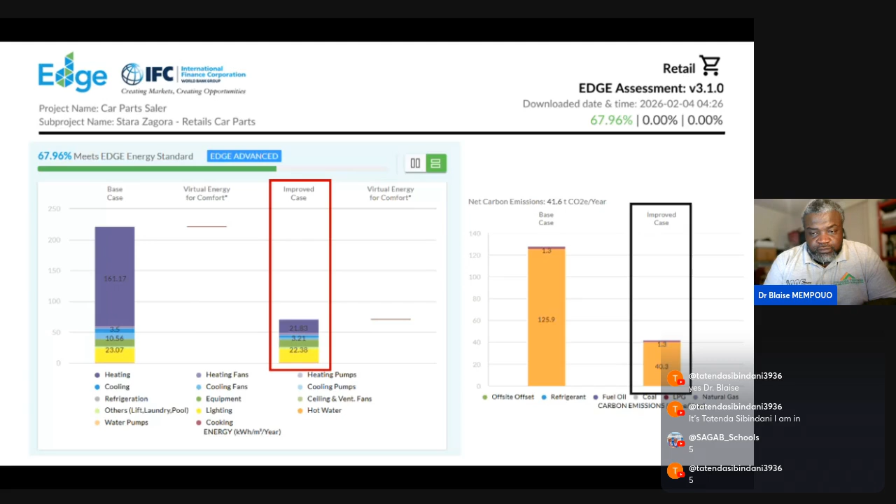Now, how the masterclass will be working, I want to tell you a bit through the journey, how we intend to set this masterclass. It's the first one, so we're managing a bit everything by ourselves. Maybe you can realize it's not easy for the first one. This is our first session, so hopefully the coming ones will be a bit more fluent and more organized.

Our aim is not to organize a kind of regular webinar. No, that's not the aim. It's a complete pipeline we are designing here. We want to take your idea, the project, from drawing board to realization. That's a bit the idea.

So like this week, it was kind of the first week, which is kind of awareness. You join the live anywhere, it can be on YouTube, LinkedIn, or Facebook, where you can just listen to what we're talking about. Then we're going to discuss more case studies, like the case study I'm presenting now. I'm going to go in depth in the coming week, just focus on case study, not presenting overall like I'm doing today, because the first one I'm trying to set the scene.

Now, the coming week will be the second week. We will go into in depth so people can submit projects. We can look at it, and if you absorb the content properly, you can prepare. We can also share some more information with you, like a brochure, share everything you want to understand more about VMF. Feel free to contact, we can share them with you.

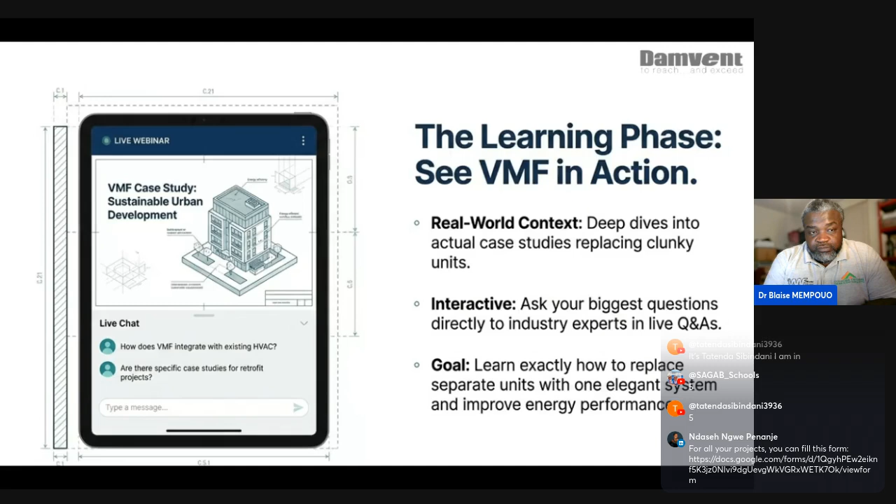Hey everyone, and welcome. If you're an architect, an MEP engineer, or a master developer, you know the constant struggle, right? Juggling all these complex systems in commercial buildings. But what if you could simplify one of the biggest challenges on your projects and get smarter, more efficient results? Well, today we're diving into something that's set to redefine how we think about building systems.

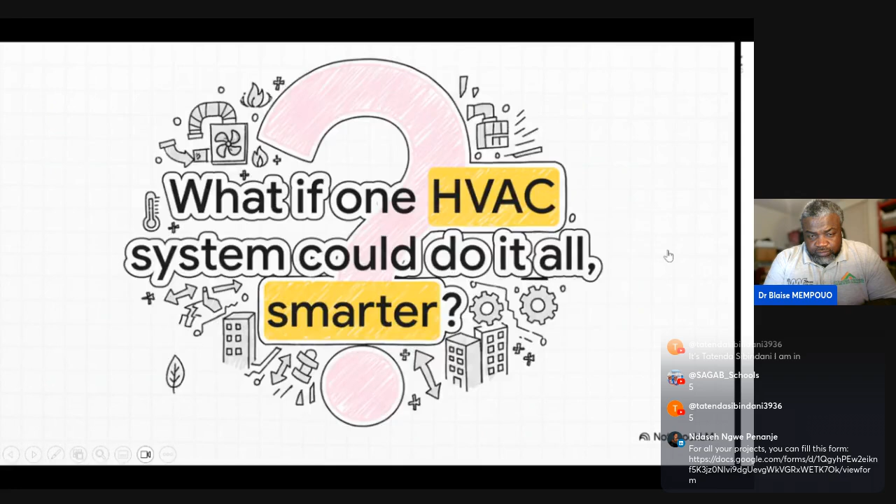So let me ask you this: what if one single HVAC system could handle everything? Cooling, heating, ventilation, humidity, and hot water, all in a smarter, super energy efficient way. Just imagine a single intelligent system doing the work of many, saving you time, cutting costs, and boosting your project's green credentials. What would that change for you? Well, you don't have to imagine it anymore. That's not some hypothetical question. The answer is here right now, and it's already transforming how forward-thinking pros just like you are designing and running their buildings. That's exactly why I'm excited to introduce you to the VMF All-in-One HVAC Masterclass.

Now, this is not just another webinar, okay? Think of this as your exclusive guide to the next generation of building technology. Ready to jump in? Here's everything you need to know. We are kicking this off on Wednesday, the 4th of February, 2026. You can join us live every Wednesday from 6:30 to 8 p.m. GMT. And the best part? You can tune in from anywhere. We're going to be streaming live on YouTube, LinkedIn, Facebook, and even TikTok.

Look, this is not a boring lecture series, no way. Each week we're going to dive deep into real-world case studies so you can see this VMF system in action. You'll get to ask your biggest questions directly to industry experts in our live Q&As. And this is the real game changer: you'll get the chance to get VIP support for your very own project.

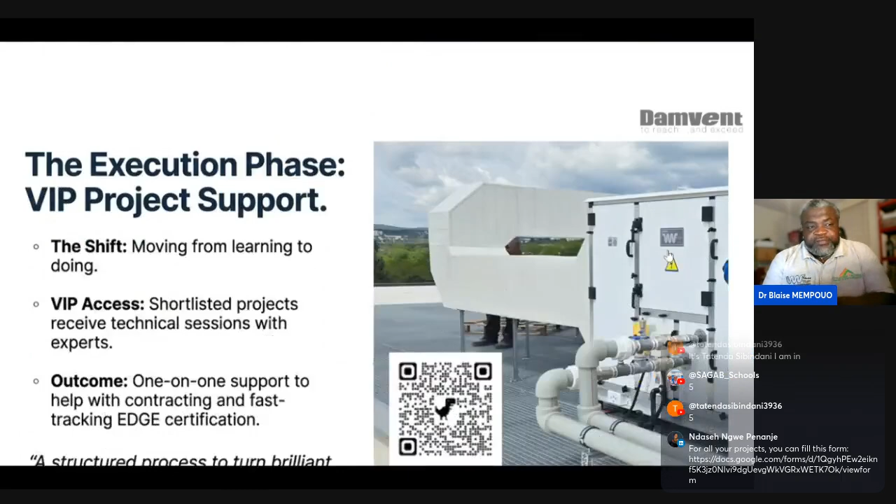So, our call for project here. The execution phase now is a VMF project support, a VIP project support. The shift is moving from learning to doing. It's not about just saying it. You can scan this code to submit your project. You have nothing to lose, it's free. It's a free consultation for you, so you can come in with a project and we look at it together. If we want to achieve a green standard, any green standard you want to achieve, maybe Edge, maybe LEED, maybe BREEAM, or any other certification you are looking for, we can guarantee this technology is the right one for your project.

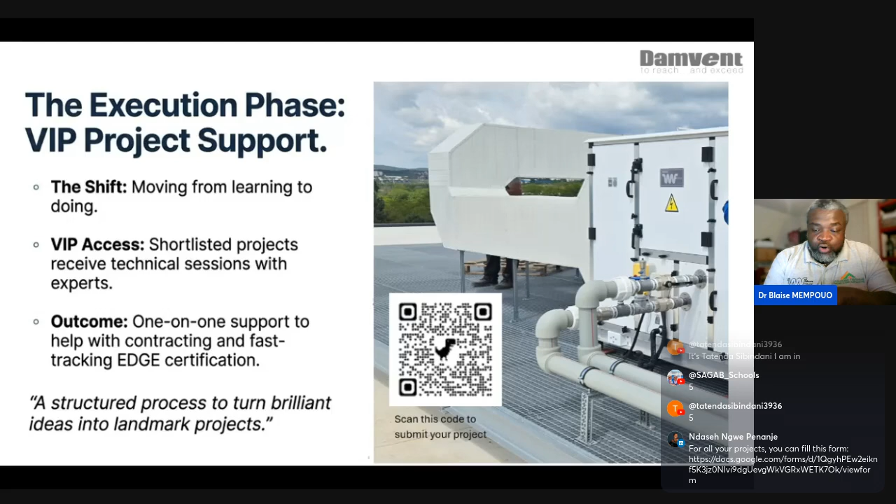The process is structured so you can turn your brilliant idea into a landmark project. So this will be the call we are giving you. You can scan the QR code to send your project in.

So what are you going to get just in case you submit your project? You're going to get full technical support, direct guidance on your edge certification, how to model the VMF in your edge certification. Whether you are looking for edge certification or an alternative certification, we can also help you. Here is a turnkey proposal we are giving you using VMF. It's a turnkey solution, so we go from your idea all the way to concept for you. So don't let this opportunity pass. Prepare your submission now, so we can go through with you and see if there's anything we can do. Please scan this code and submit your project.

So what will be coming in the next coming weeks? Next week we are going to go in depth again into different case studies. The coming weeks we're discussing more different case studies, real life projects that we're going to discuss with you, more practical cases of VMF, how it can be used in real life projects. And if you have your own project, we can also discuss the idea, taking it from drawing board to landmark project with full technical backing from the VMF team, the Damvent team in Lithuania.

At Damvent, bridging the future of green building. At Damvent, we don't follow trends, we develop solutions and concepts. That's the idea: bridging the future of green building, by developing new concepts all the time. Damvent is a world leader in hybrid ventilation systems. It's really important to note that we've been around for more than 30, more than 35 years. You are free to visit the website and find out more about Damvent.